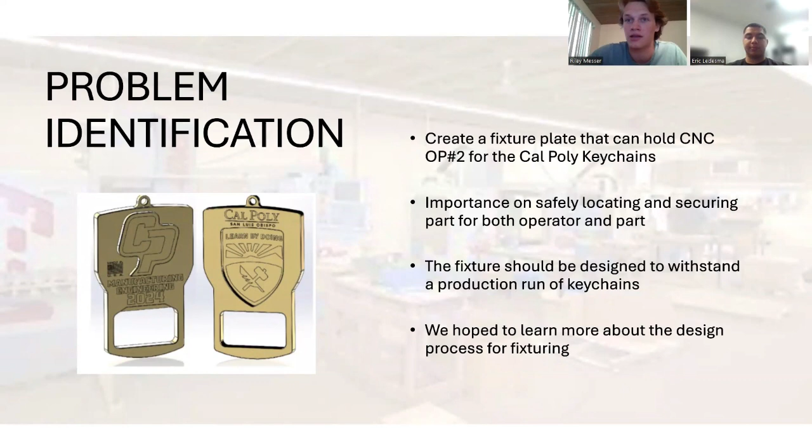For our problem identification, our problem to solve was to create a fixture plate that can hold CNC Op2 for the Cal Poly bottle opener keychains. The importance of this problem is that we have to safely constrain the part while operating and also locate it properly. And we hope to learn more about the design process for fixturing through this project, which we did.

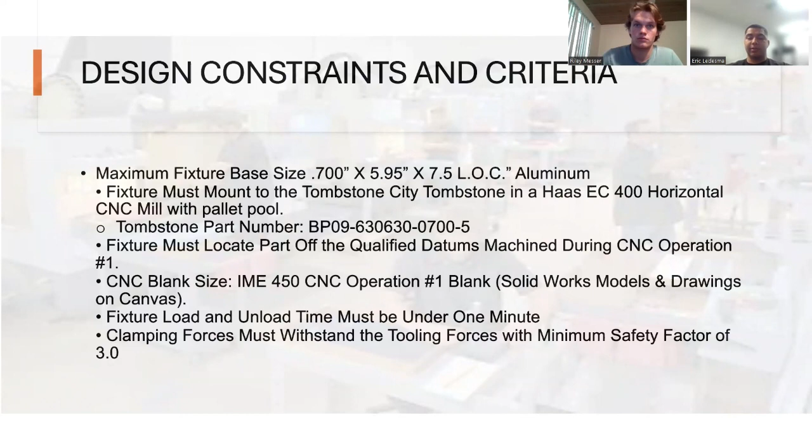Now, as for design constraints and criteria, you gave us a list of criteria that we needed to meet. So we have a maximum fixture size, and it has to be made out of aluminum, needed to be mounted to the Tombstone City tombstone on a horizontal mill. We made sure of that. And then most importantly, work off of the qualified datums for the operation so you have a correct part, quick load and unload time, and a safety factor of 3.

Now, as for the fixture design process, we felt like we had to include these criteria for our own sake as well. So, of course, the locate and clamping to make sure that it's in the right place and it's not going to move with the support. And then we made sure the material is not going to fail and there's no interference with the toolpath whatsoever in terms of clamp, dowel pin, rail, nothing at all. And it's easy to install and remove.

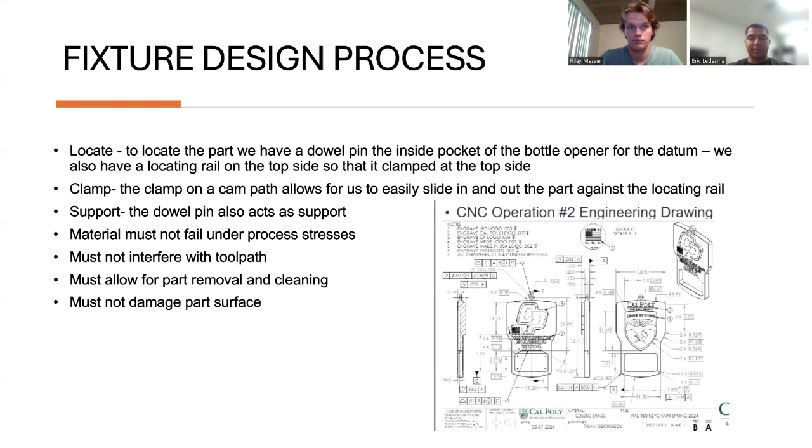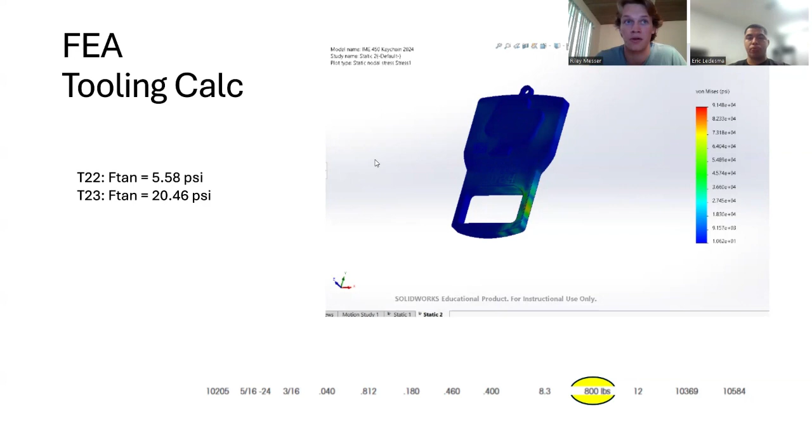These are the standard parts that we decided to use: MiteeBite, locating rail, and clamp, as well as a dowel pin for locating. So for our design, this is our FEA and tooling calc. So we did a calculation of what the tooling forces would be and if they would work with our clamp and the material. So our clamp is rated at 800 pounds, so it can hold 800 pounds. And our tools calculations came out to be 20 PSI, which with a safety factor, that makes it 60 PSI. And you can see with our FEA that we're well within the requirements for what we need to safely hold this part.

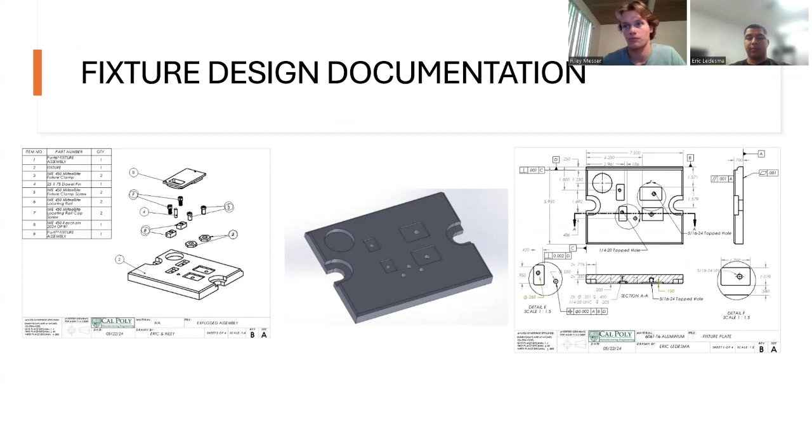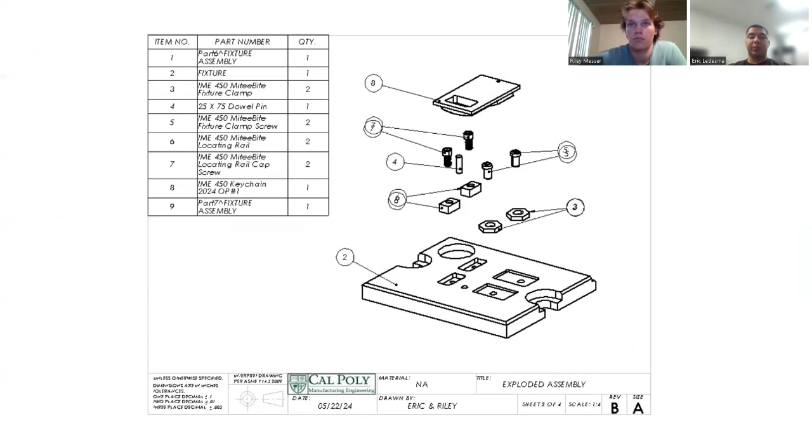And now we get into the documentation of the actual fixture design itself. So this is the CAD model that we decided upon. As you can see, we have 2 locating rails, 2 clamps, and a dowel pin for locating as well. This is the exploded view with the bill of materials, so they understand where each of the parts are and where they are placed.

This is the most important slide right here with the design criteria that we felt was necessary. As you can see, we have datum D acting as an indicating band, so you can line it up with the x-axis every time. Perpendicularity call out with datum C to make sure that thing is square. And then we also have the importance placed off the flatness on datum A, working with 1 thou there so that we have a parallelism of 1 thou on the parallel plate on top to make sure that that part is sitting in there flat every single time. We also have a positional tolerance on that dowel pin on the bottom left corner right there. We want to make sure that thing is locating and doing its job every single time you clamp, as well as the perpendicularity call out on that locating rail pocket.

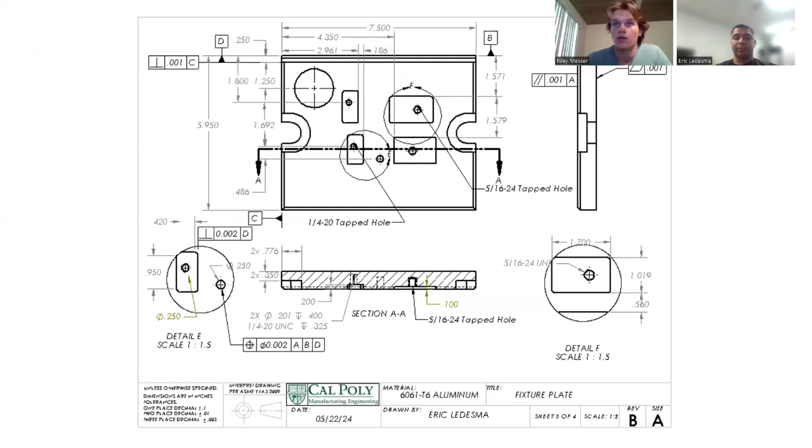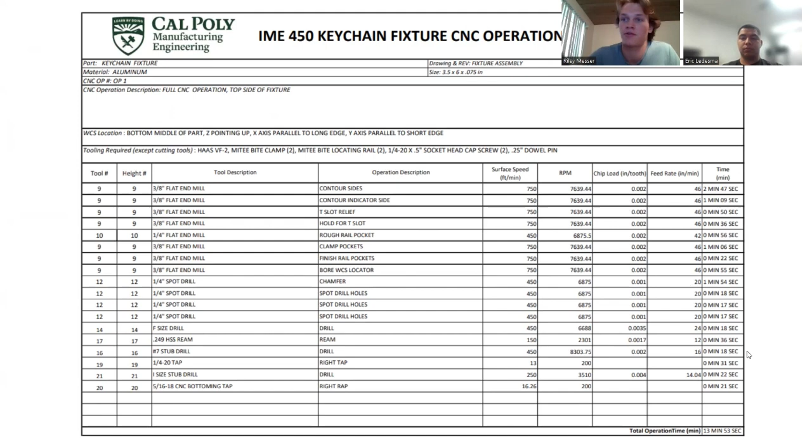So for our fixture manufacturing plan, this is our CNC operation planning sheet. This shows the different tools that we used, as well as the operation descriptions, the feeds and speeds, and the time to complete each operation. We started out milling, and then we moved into drills, and we came out to a total operation time of about 14 minutes, which we believe is quite quick.

This is the cost that we came out to. As you can see, we have our shop costs and our engineering costs, which we thought is more than fair and standard in this industry. Total cost came out to $1,335.51.

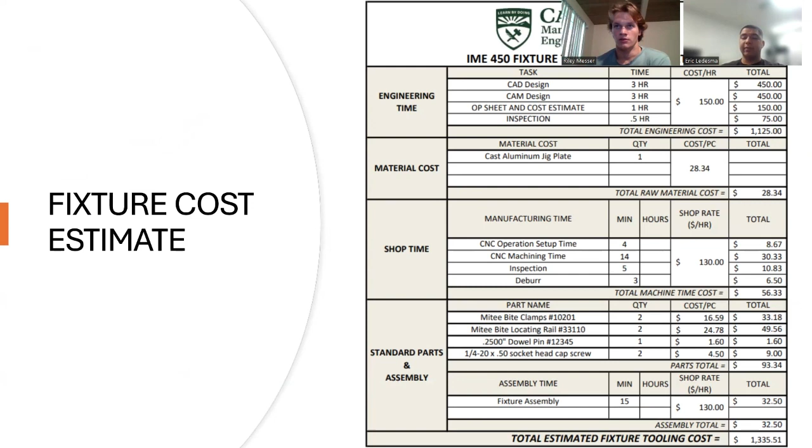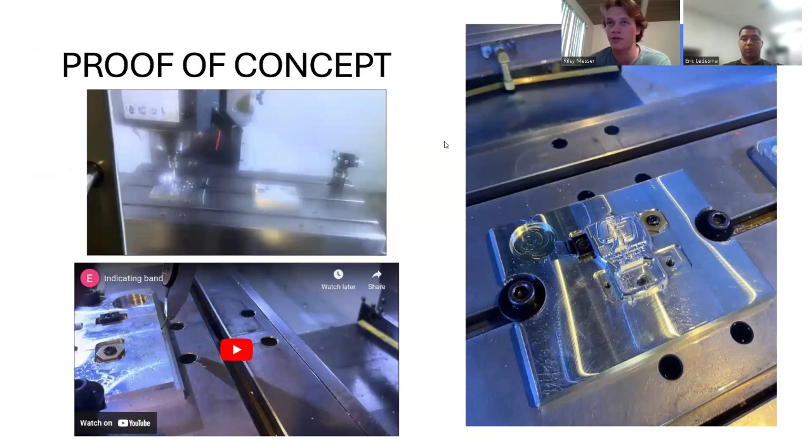So for proof of concept on the right, you can see our finished part in there. And over here on the left, you can see the fixture setup. To probe this fixture, it only takes under a minute and a half, which is quite quick, and which leads to improved efficiency.

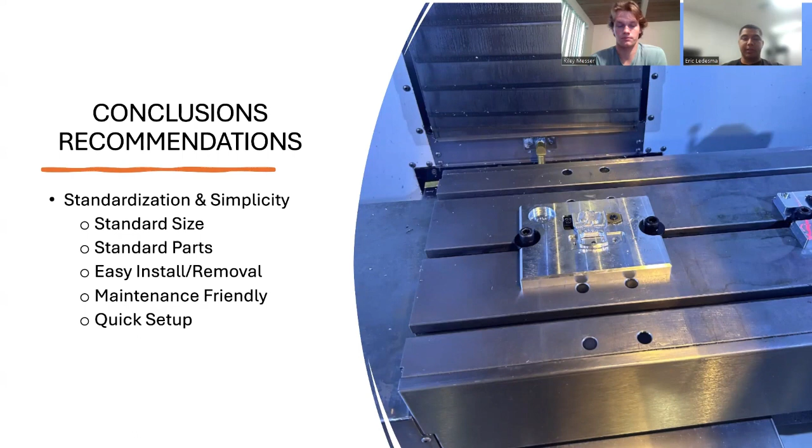Now, as for conclusions and why you should buy our fixture plate, we want to make importance of 2 designs: standardization and simplicity. So we have standard sizes, standard parts, easy install, easy removal. It's maintenance friendly, very few minimal working parts, easy indicating band on top, as well as the little work coordinate system bore right there, so you can get a quick setup and it works, which is what you ask of a machine shop: fast, efficient, simple.